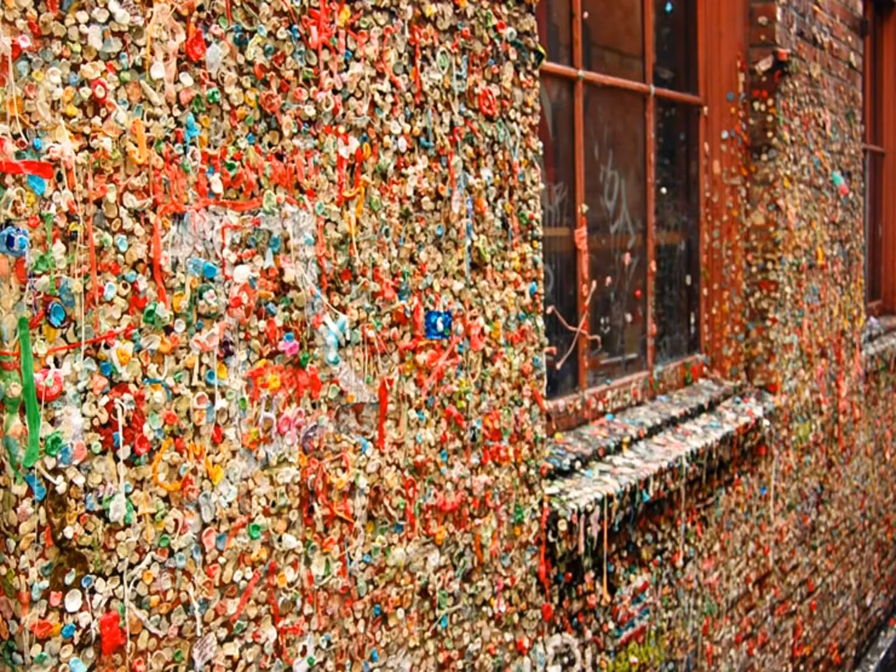Here's a bit of a test for everybody. Since you've been to Pike Place Market, can anybody tell me what this is? This is a tourist attraction called the gum wall, where for about 20 years, up until November of last year, people walking in off Pike Street, crossing First Avenue and heading left, would find a little road tapering down below the market and hooking south. That's where the gum wall is, in case you haven't seen it. It's not in that condition anymore, because in November of last year, the local businesses and residents of Seattle petitioned and got it removed. They took 2,350 pounds of bubble gum off that wall. Maybe there's an opportunity for a modifier there, I don't know if anyone's thought about that, but just a little bit of information.

Anybody traveling with kids? Not too many hands. Well, that's good, because you wouldn't want to take your child down there. You also may come away, if you had a child with you, and noticed they weren't chewing gum before they visited the wall, you might want to pay attention afterward.

All right, well, I guess it's time to get into the fun, exciting stuff of asphalt. Just a few facts about our agency, though.

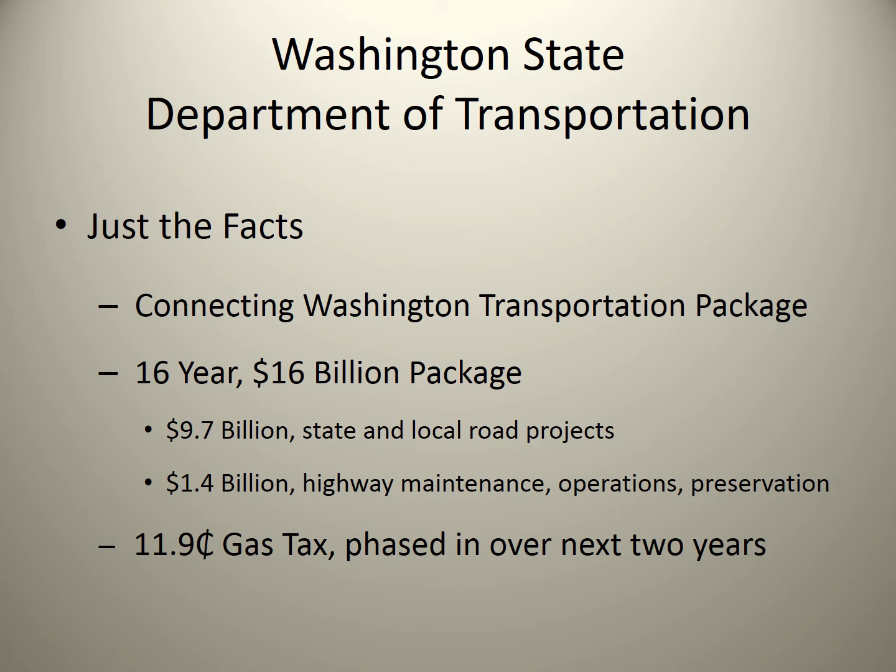After the presentation given earlier, Washington State, a year ago, was in pretty dire straits. We didn't have much in the way of funding, we didn't have a budget package. We were getting to that situation Delmar talked about with pavement preservation. Our pavement management system showed we had enough money maybe to pothole patch and maintain our highways. Fortunately, at the end of last year, taxpayers and politicians in our state passed a budget through our Connecting Washington package, our transportation package. It's a 16-year, $16 billion package. Of note is $9.7 billion for state and local roads. We also have $1.4 billion for highway maintenance, operation, and preservation, phased in over 2 years with a gas tax of 11.9 cents per gallon for the next 2 years.

A little bit about our agency, some facts. We manage approximately 18,500 lane miles. It is our charge, our duty to maintain or to build and maintain smooth, safe, and economical pavements.

A little bit about our forecast. Our construction office does a very good job of predicting and tracking what our projections are from year to year. This is our 2016 forecast. We anticipate a little over 1 million tons of HMA placed.

In my 30 years with the agency, I think our record year was just south of 3 million tons. We've had up to close to that, but I've seen it as low as 600,000, and that's where we were getting to with our lack of funding until recently.

We don't expect to see a huge change in our construction program this year. It should start picking up a little bit more next year, and then as we start moving into getting the funding, we'll be getting more projects placed out there. Of that little over 1 million tons, over half is anticipated to be built with modified asphalts.

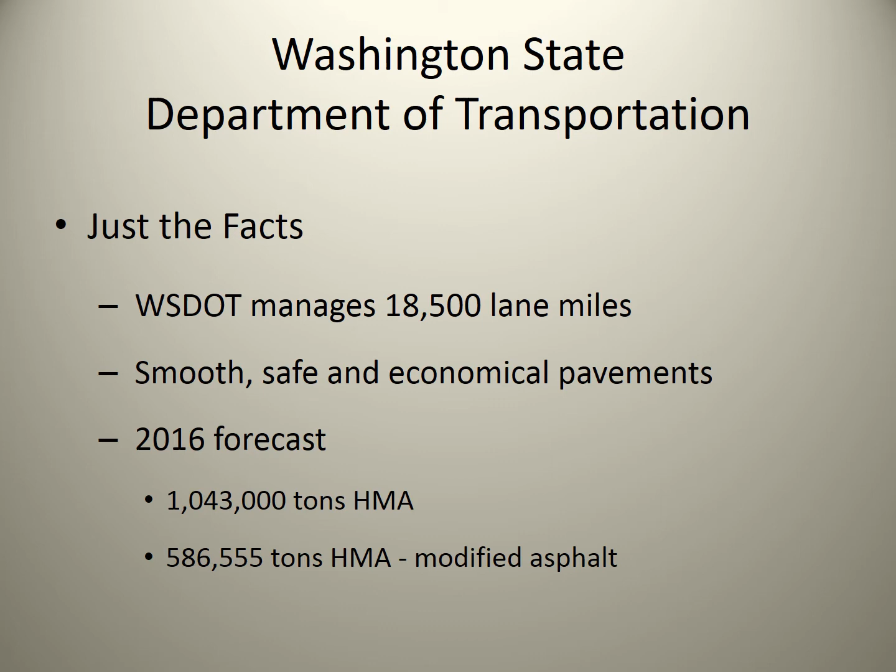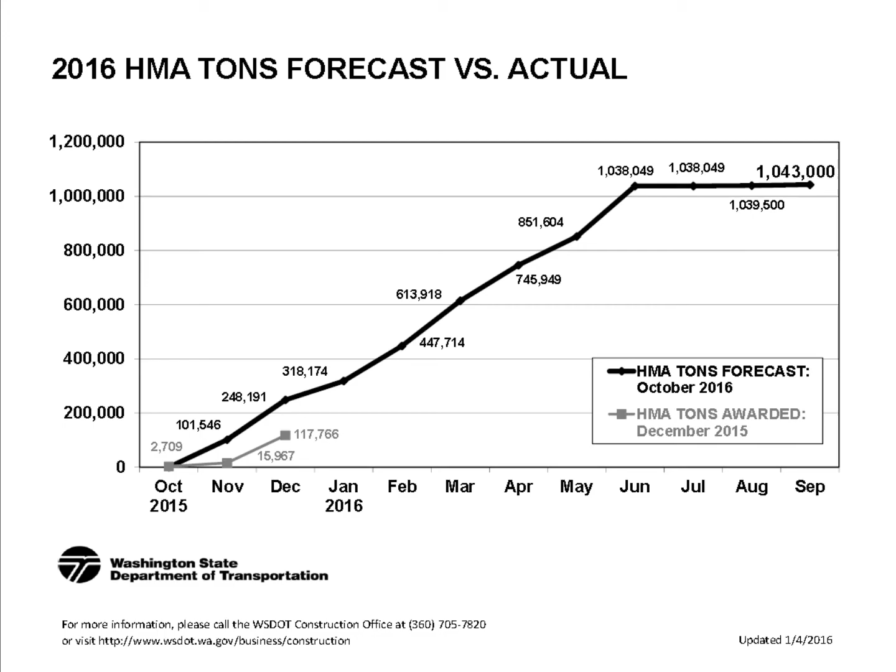Okay, a little bit of background about how we got to where we're at. It was through the Superpave SHRP efforts. We got into the pooled fund studies in the mid-90s, and we started working with the PG binders, performance graded binders, first. While participating in the pooled fund study, we started placing test sections on projects, and then ultimately worked our way up into trial projects with the PG graded asphalt.

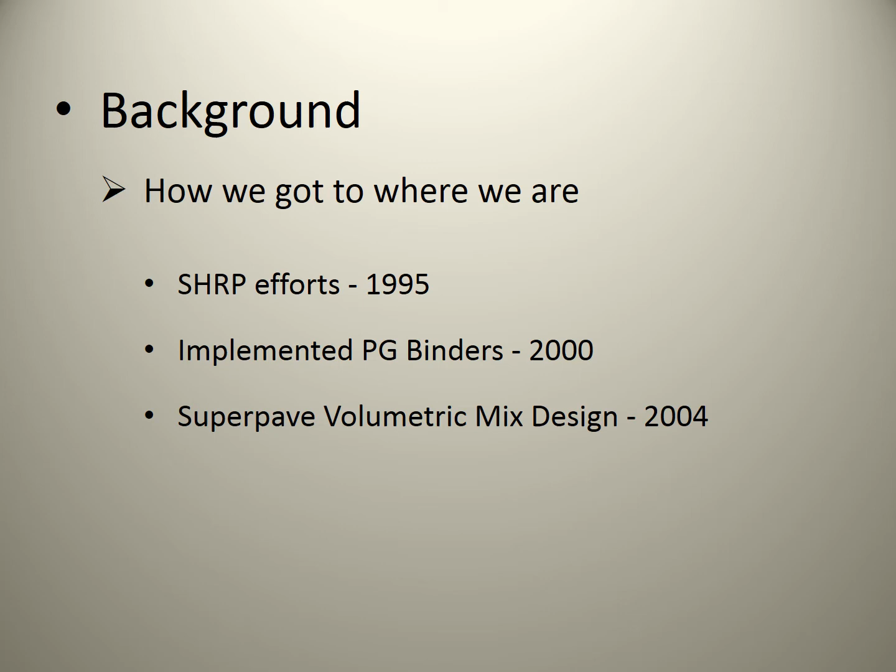Our first PG graded asphalt trial project was in 1996, and then we fully implemented the PG binder system - actually it was 1999 when we implemented it, but you didn't see it in print in our specifications until 2000. As we moved into Superpave, we did the same concept: test sections, then trial projects, and ultimately implemented Superpave volumetric mix design in 2004.

Over the years, the things we've learned are the importance of asphalt and anti-strip compatibility. We also learned quite a bit about asphalt modification - the products and the processes used to modify asphalts - and the benefit from some polymer modification. We learned a lot of this primarily through use of our Hamburg and our multiple stress creep recovery testing.

As a footnote, we've been testing using MSCR well before its T350 test procedure, or M332. We started testing early on after we saw D'Angelo's work, and we were doing it when the temperatures were still elevated. But every binder that we get in our door at the DOT, we've been testing with conventional M320 as well as M332, so we've got a lot of data. We've learned quite a bit about the asphalt binders we have in our state.

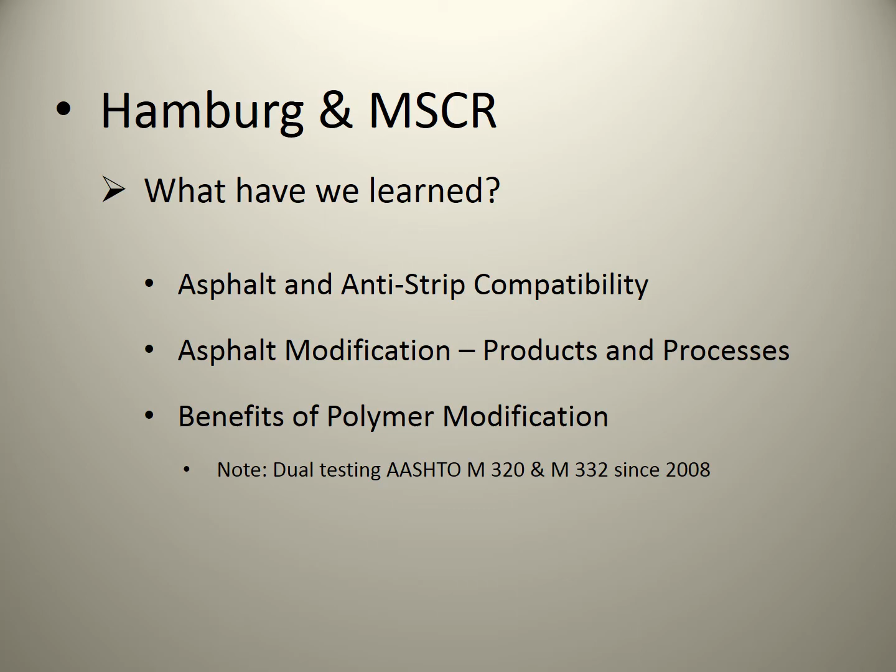Okay, on to the Hamburg. I used to say Hamburg, but since I was born in Germany, I should pronounce it the way they would, which would be Hamburg.

We don't have the MSCR currently, and I'll get to that - good question. But we really hope to, and later on I'll make kind of a plea to everybody here about what we'd like to see done in Washington. We seem to be the only state in our region so far that's pushing hard into that.

With the Hamburg, we bought our first Hamburg in 2010, and once we got it, we started testing every mix design we get in our door.

On average this year, with a little over 1 million tons, we're anticipating somewhere between 80 and 90 mix designs in our doors. So we've got a lot of data that we've tested with HMA using our Hamburg.

2010 is when we started testing every one of our mix designs. If you know anything about those, we set it and forget it, and you come back with 6 to 7 hours later. This is one of the early mix designs we tested, and what we believed through our Hveem stability mix design was a good product.

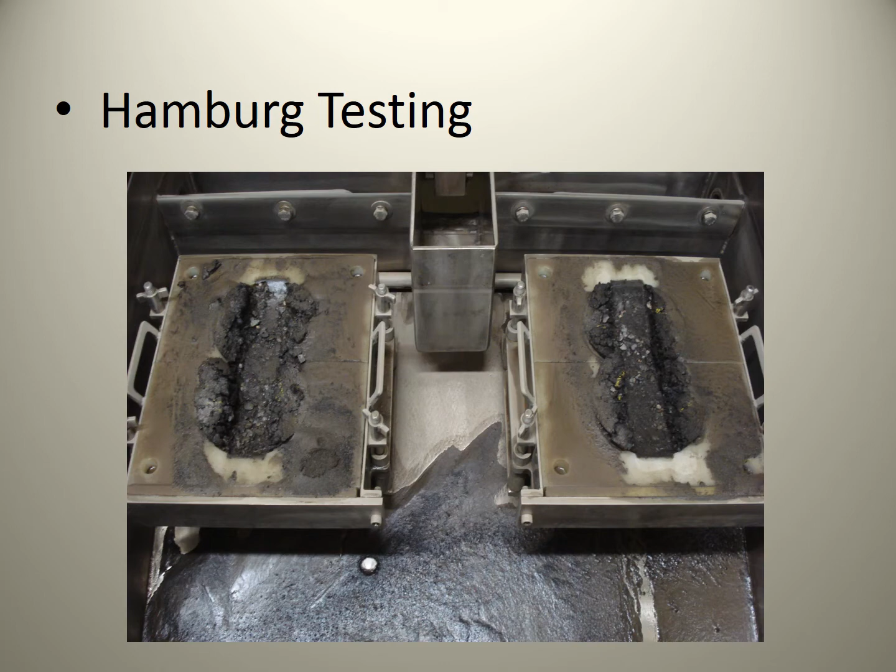Here's another nice one - anybody see silty fines? So these are the type of mix designs, not everyone, but we were seeing somewhere in the neighborhood of maybe a dozen of those out of say 80 mix designs. That's a pretty high percentage as far as we were concerned, where we were seeing questionable or concerning results out of Hamburg.

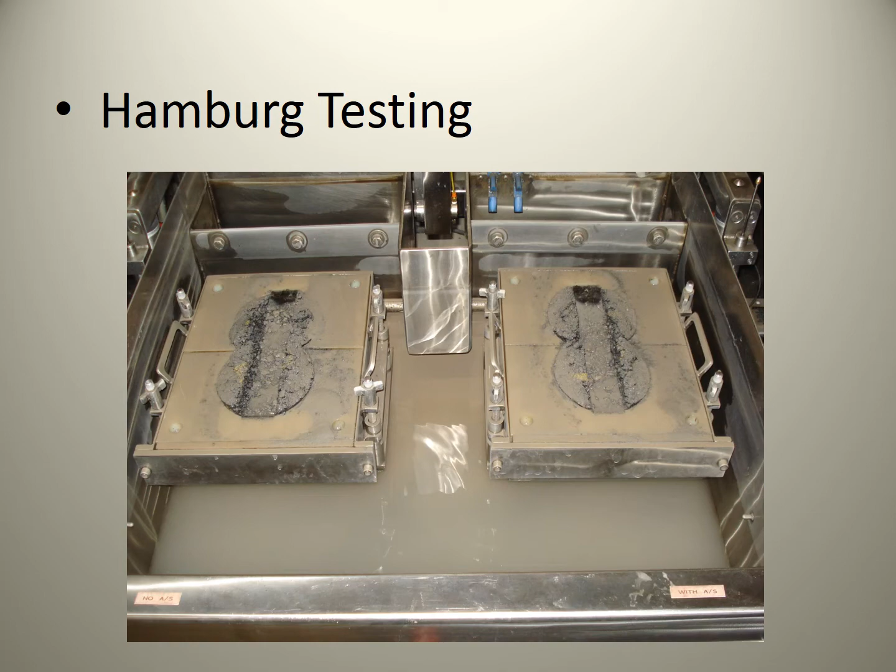I got to do that. I got to convince myself.

Okay, as I mentioned before, a little bit of background. This is our state - we use what I call a modified Lottman process. That's because we took the T283, and again, because of the sheer volume of mix designs we evaluate through the year, we don't do the 3 replicates at every point. We do a single set. So that's why we had to do our secondary modification of that.

As we test in our Hamburg, we'll always test a sample with no anti-strip. We'll also test samples with anti-strip based on what our modified Lottman procedure tells us. So if we see a benefit in tensile strength, and/or if we see any stripping with no anti-strip, we typically would move to using quarter increments of a typical amine-based anti-strip. I think nowadays we have somewhere in the neighborhood of 24 different anti-strip additives on our QPL. So you can imagine it's quite a thing to manage, or to say that we're using the same materials in every one of these mix designs with the binders.

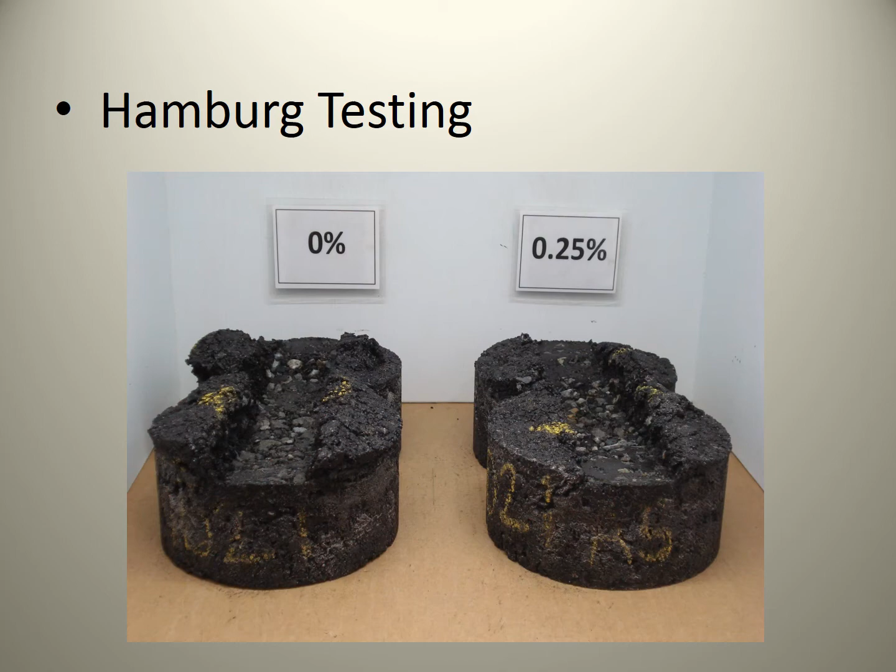This is a conventional half-inch HMA mix design that we tested in 2011, where, by the way, this is a neat asphalt - this is 64-22 half-inch HMA. When we ran it through our modified Lottman process, we saw a benefit by using 1/4% anti-strip. So as we tested it, neither one of them looked excellent, but graphically, here's what that looked like.

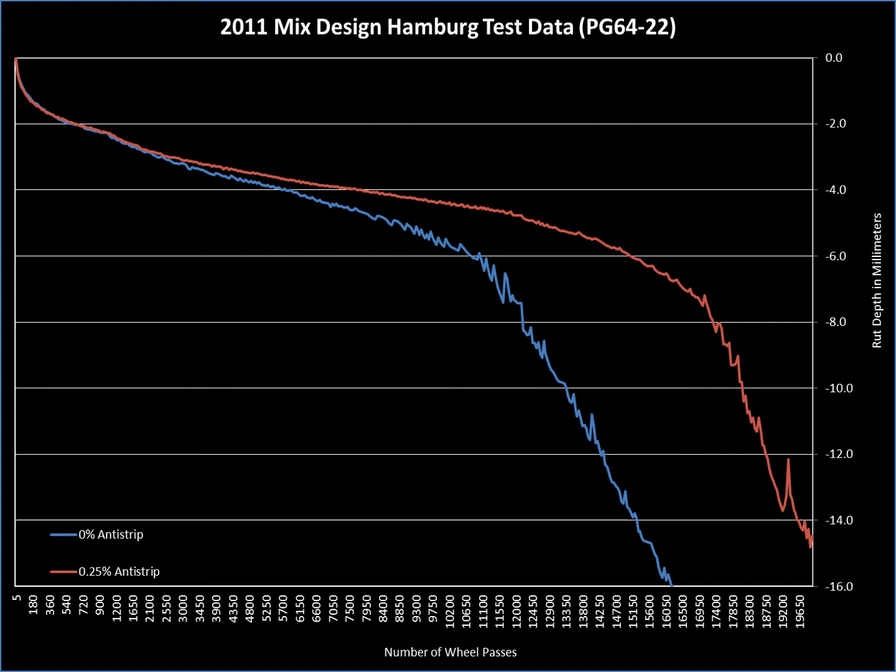We did see a benefit from using anti-strip, and if you fast forward, the specification we're using for Hamburg would have failed with no anti-strip, because we have a 10 millimeter rut depth maximum and it has to have a minimum of 15,000 passes. So you can see here we were able to get this particular mix design to pass under what we use as a specification by use of anti-strip, and this again was with a neat asphalt.

Okay, here's where things start to get interesting for us. In 2011, we started noticing a trend. When we tested this particular HMA, another conventional mix, with what we expect to be a modified asphalt - we have the two together, that's 92, 64-28.

You don't see in the picture that we had any stripping, but we definitely saw something that we consider to be an indication of compatibility issues with asphalt and anti-strip. In our state, we don't get into formulation or dictate what it takes to meet the specification. We try to rely on our test procedures and specifications to get products we know will perform.

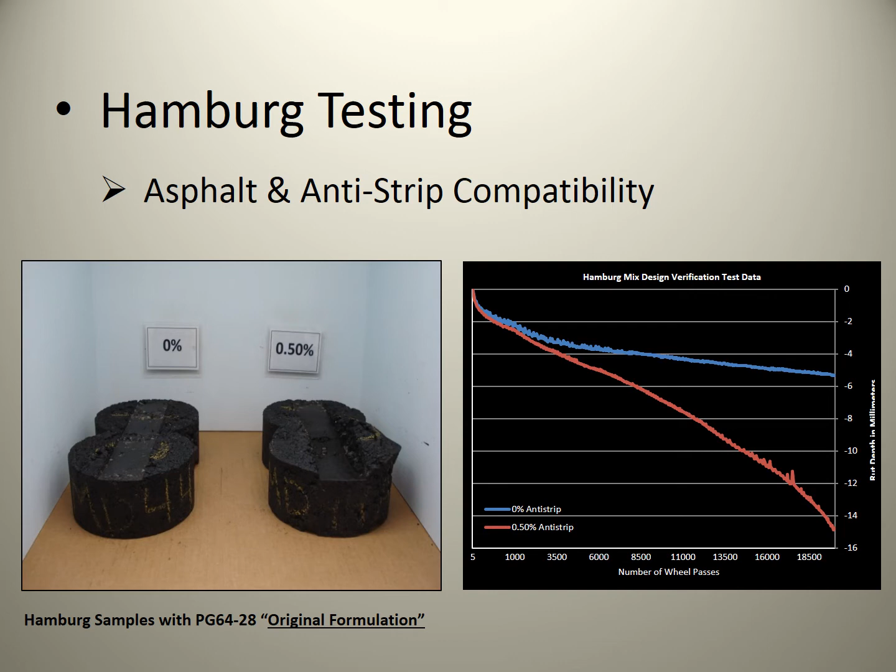So this is what we saw, and this was not the only mix design where this happened. After we saw this particular mix, we did our due diligence and went back to analyze the data we had.

We not only test every mix design that comes in the door, which met all the volumetric properties, but we also test all of our asphalt binders. Asphalt suppliers in our state know that when we're working on mix designs, we come to you directly and get 40 quarts of whatever grade of asphalt it is. We test those to make sure they're in specification, and we use those materials in our mix design analysis.

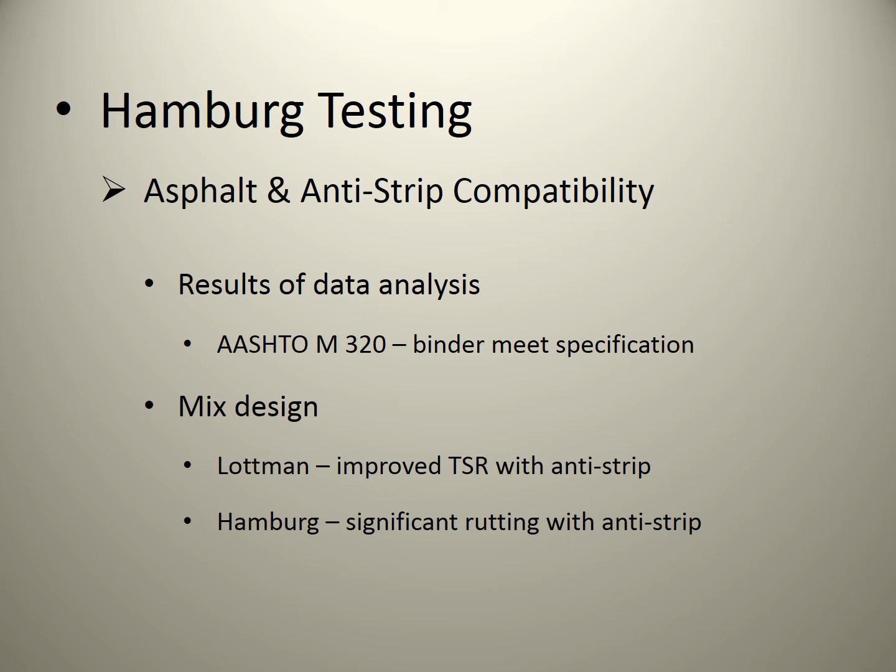This particular mix had no problem meeting the M320 specifications. Again, when we tested by the Lottman process, we showed improved TSR, as I mentioned, at 0.5%. The Hamburg test just showed there was a compatibility issue, we believe. That's about as far as I want to get into the compatibility side, because I'm not the chemist. There are probably a lot more people in this room who can tell me much more about that.

So the particular asphalt supplier that provided that product was very forthcoming. We contacted them and asked a little bit about the formulation, told them what we observed, and they said no, it was not a polymer modified product, but it was modified. That's as much as we wanted to hear.

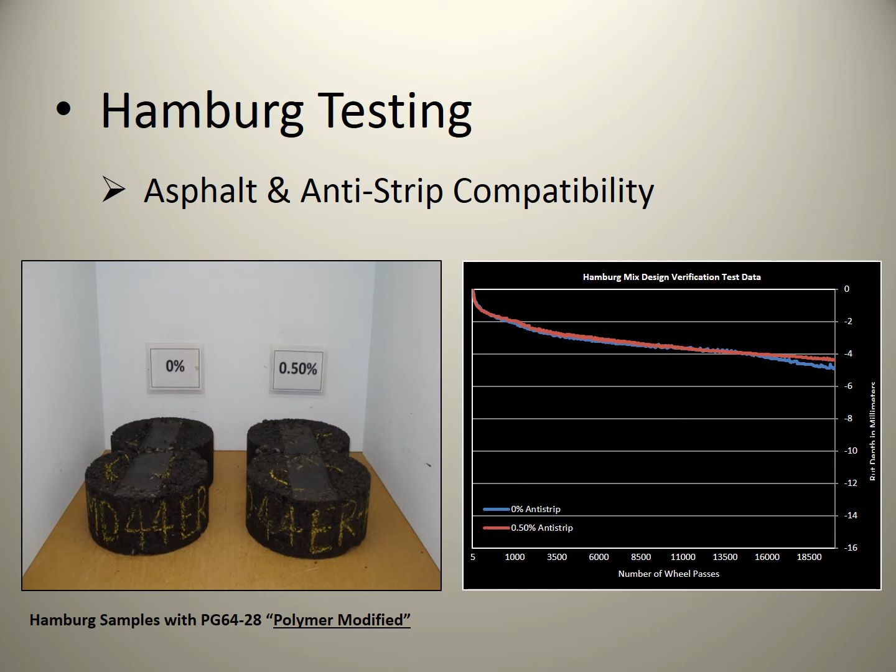But they did offer, and provide to us, a 64-28 that was polymer modified, and this is that exact same mix design with a polymer modified PG 64-28. The results are pretty much on top of each other with no anti-strip. That's very consistent, kind of a stack of the two, that's what we saw.

Again, this is the same material, the only difference is the binder. So when we started looking at what we had coming in the door for our typical modified asphalts, we use 6 grades in the state, but everything we're getting in the door shows a very, very low failure rate of asphalt binders. Everything we're getting in the door is able to meet M320.

We have been testing per M332. We've been testing these products and they have been meeting the JNR and the other specification requirements of M332, excluding the table, the appendix table in Appendix 1, or X1. In addition, once we started seeing this back in 2011, we started testing these materials per AASHTO T301 using elastic recovery. We were resistant to being a plus-spec state, we've just been marching the party line with M320.

We used to be an AR4000W state, and had a little enhancement on our viscosity graded materials. In Eastern Washington, where we have the bulk of our modified asphalts, we used to use a lot of PBA6. When we went to M320, there's no mechanism there - the modification products or processes we're getting were probably not very similar to our PBA6 in order to meet M320.

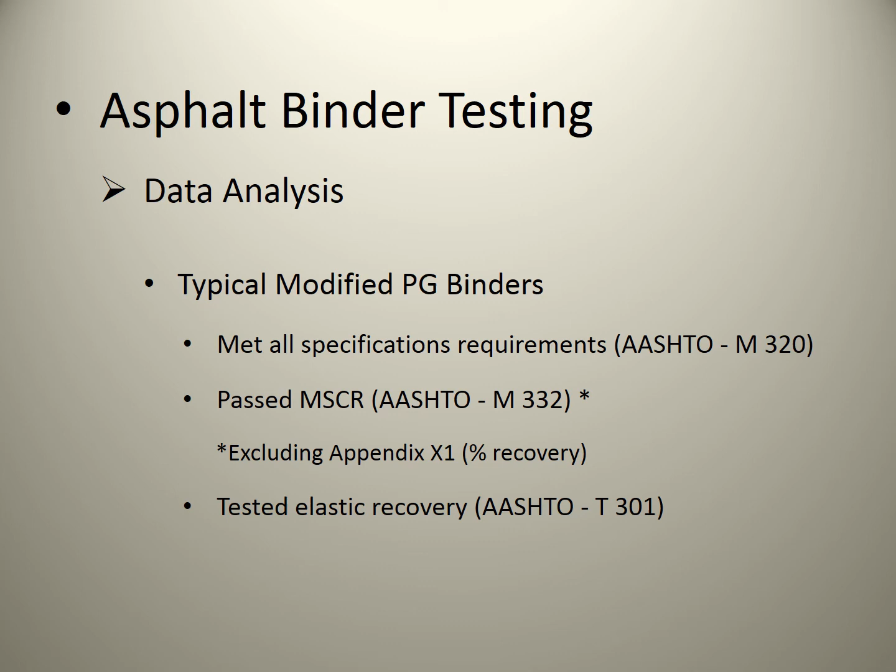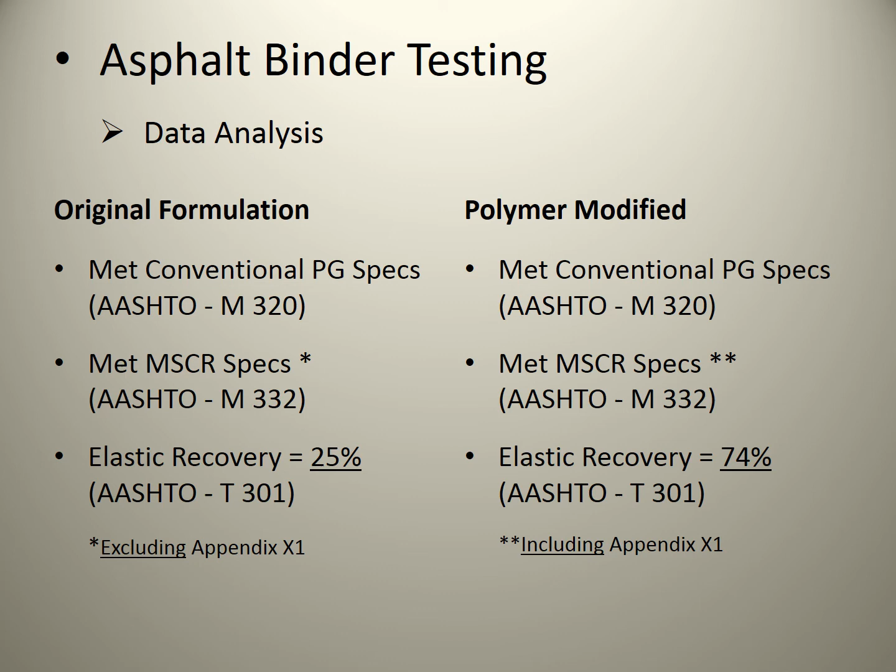So, a little bit of information. These are the two binders that we did that little experiment with. I already mentioned they both met M320. They both met M332, except for the one on the left - the original formulation wouldn't meet that percent recovery table in the appendix. When we tested it per T301, you can see what we got, 25% on the elastic recovery. With that new product, we were able to meet not only M320, but the table. We met the percent recovery, and got a substantially higher number on the elastic recovery. I'm sure you can see these values.

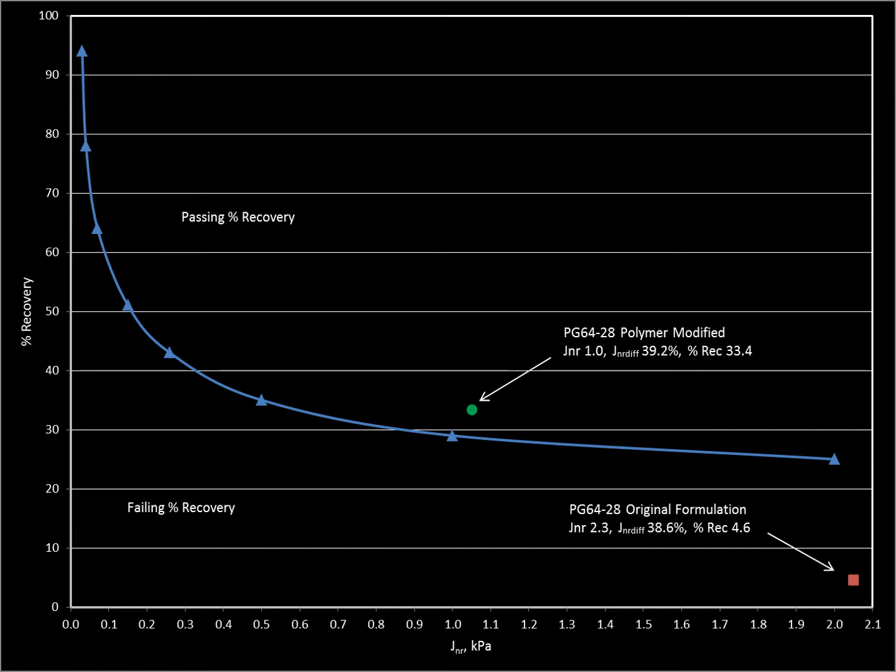Based on the couple of years of data we collected off of the Hamburg and the MSCR, we had to do something to make sure we're getting material that's going to perform. So we did go ahead and implement an elastic recovery specification based on the data we collected for those 2 years. Ultimately, as we moved forward for the next 3 years, collecting information on both our Hamburg and IDT, we also implemented those specifications in 2014.

The IDT specification we're really using as a bookend. The Hamburg loves stiff mixes, but we don't have an overlay tester like Texas or some other states. Those using Hamburg, I think, are all moving to something as a secondary check to make sure they're not getting some form of fatigue cracking. With the equipment we had from the old static press from the Hveem days, we saw a benefit by moving into a room temperature, basically IDT test. So we're using that as a check to make sure we're not getting too high a strength on that and pushing that spectrum too far into stiff, brittle mixes. I'll talk a little more about that in a minute.

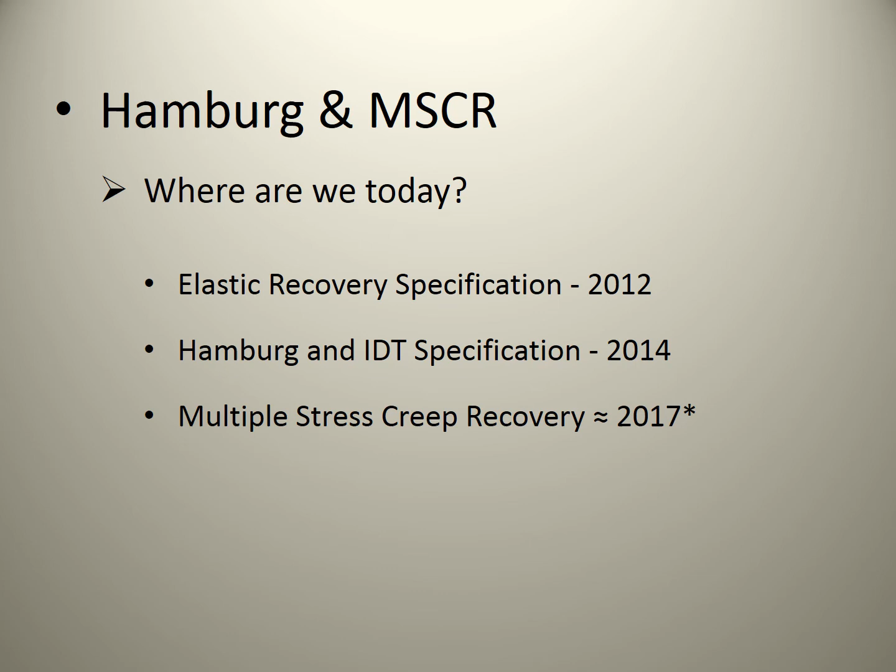Ultimately, as you mentioned, or the question earlier, we're wanting to move to the multiple stress creep recovery test. We've been working quite a bit with this, and I'll talk more about that as we move along. Here's what our elastic recovery specification looks like.

Our state is divided pretty much straight north and south by the Cascades. The 3 grades we use on the west side of the mountains are all PG-22. Our base grade is a 58, with bumps to 64 and then 70. Our east side of the state is all PG-28, with a base grade of 64, a first bump to 70, and a second bump to 76. That's what you see here with our grades of asphalt.

We didn't implement it, obviously, on our neat asphalts. We do have a 60% minimum on the other 4, what we consider to be modified asphalts. And this is a stopgap until we can get to something that we would prefer to do, which I think you know what that is.

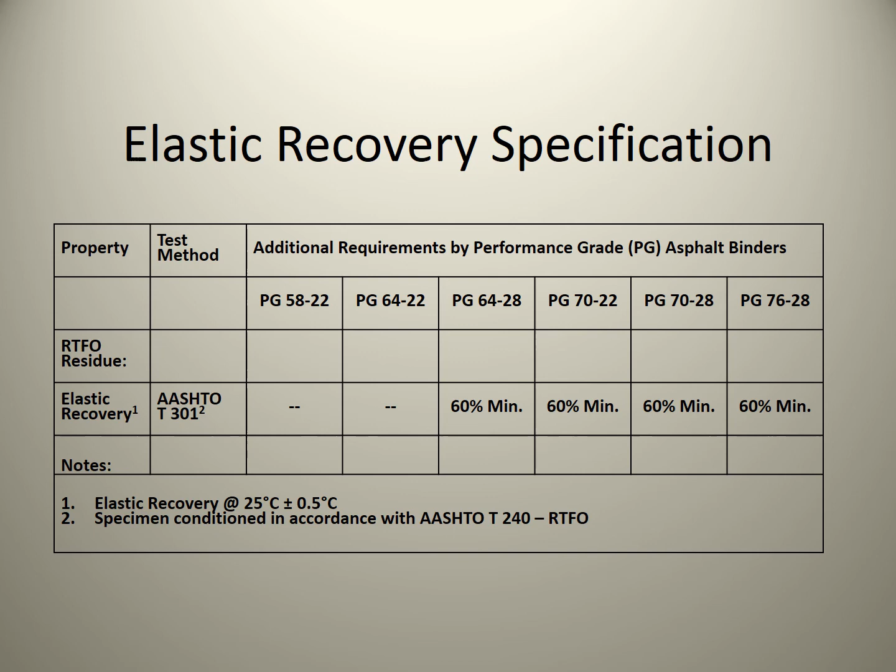And this is our specification. These are all in our 903 standard specifications if you're ever interested to look at these. When we first got into Hamburg and did a lot of this initial testing, we relied heavily on what Texas did, Colorado, Montana, and Utah were doing. Those are the 4 primary states we gleaned information from. Then, when we went back and tested all of our materials for almost 4 years, we came across what we believe to be a pretty fair and reasonably easy specification to implement.

So everything, as I mentioned before, was based around 15,000 passes with a maximum 10 millimeter rut depth. Again, with 15,000 minimum passes, you're not allowed to have any stripping inflection point prior to that, any indication of moisture susceptibility. And then we're using right now 175 PSI maximum for that IDT.

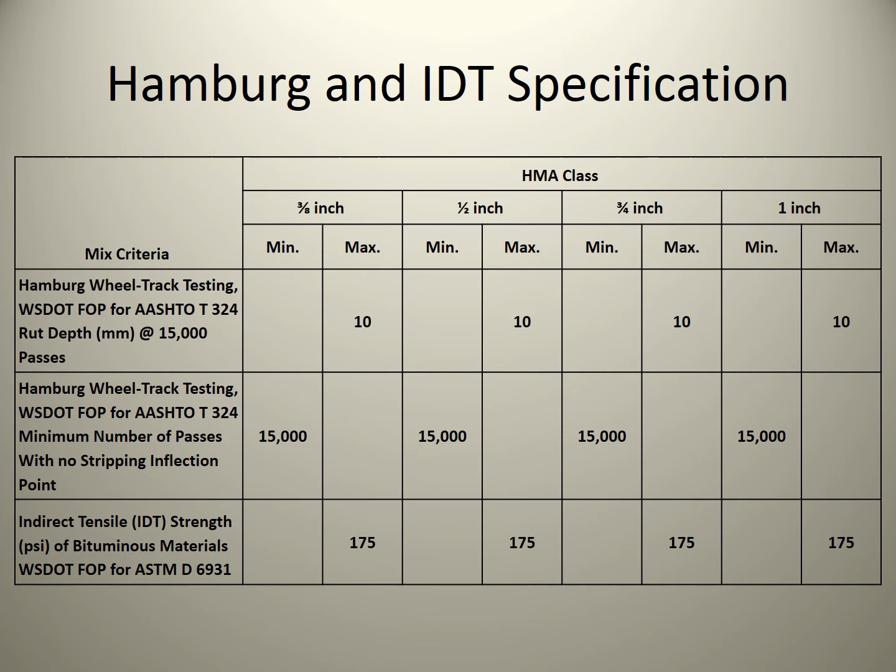We are working, again, with information we're gleaning from Texas A&M Transportation Institute, TTI, Dave Newcomb and those folks, to mathematically see if we can come up with a better way to determine this stripping number, or stripping inflection point, whatever you'd like to refer to it as, so that we can be more fair and equitable about when that takes place, so we're not just using a straight edge to see where we can spot a change in slope to determine moisture susceptibility.

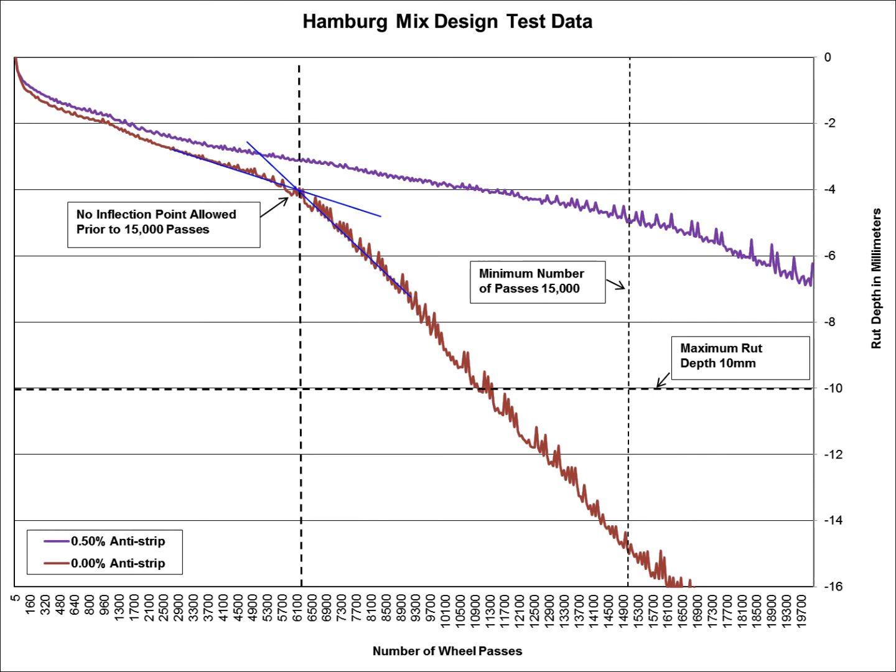They're working on that area under the curve, or the fracture work concept, and we're looking hard at that to see if we can come up with a better way of specifying that instead of just saying a maximum stiffness or a maximum strength. We really need some dwell. I think you need some opportunity to see that those materials will be able to sustain a load. So we're working a bit on that.

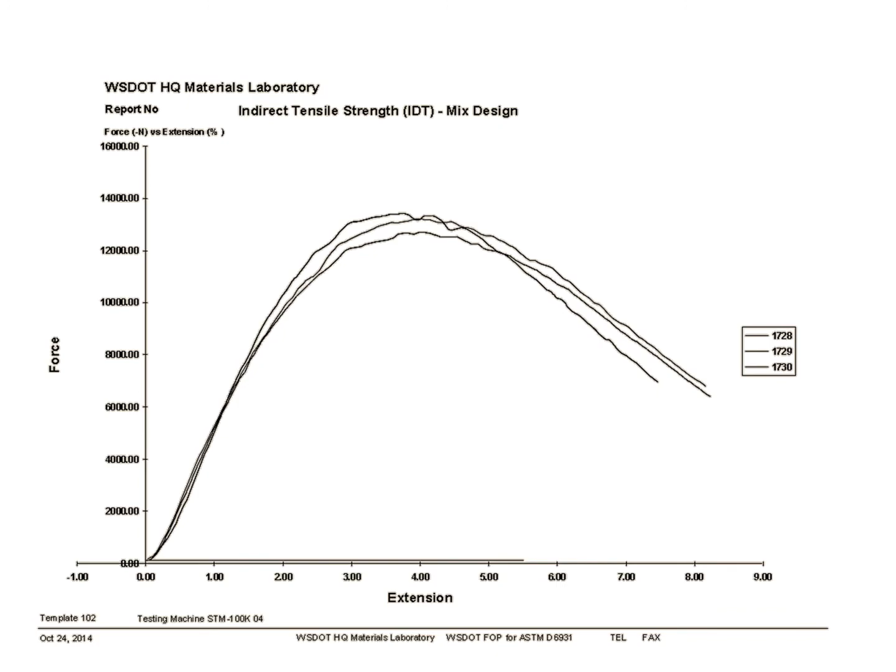And I guess getting to where we're headed next, to kind of answer the question that was asked earlier, the multiple stress creep recovery is what we really want to see move forward. We've been working with everybody and anybody that will listen to us. I'm on the Washington Asphalt Pavement Association task group.

We're breaking out with some of the suppliers and working on this. We've been working with the Pacific Coast Conference, where I'm co-chair for the MSCR task group. And a little kudos to Mike Anderson and Asphalt Institute.

They helped us immensely to put together an interlaboratory study last year, I guess it's probably two years now, Mike, where they took our results, plotted out, came up with what we had for precision and bias. I think our numbers matched up pretty well to what the East Coast User Producer Group had, and I think there's two or three other ILSs that have conducted the same work. Yes, the reproducibility and the numbers are not where we would like to see them, but I guess the thing I want everybody to remember is, when we went into PG binders, were those numbers, were those precision and bias statements as good as you would have liked to see when we made that move?

I don't think so. As a matter of fact, to this day, the PAV DSR is not great. I really wish that everybody would strongly consider this. I guess this is kind of my beating the drum and asking for help.

We're looking for regional assistance. We're talking to other DOTs, our asphalt suppliers, and I guess I'd ask everybody in this room, in whatever capacity you fulfill or whatever your role is in this industry, to try to test these materials using M332 or T350, and compare them to M320, so we can get consistent results and everybody gets comfortable and moves forward with this. I think the technology is there.

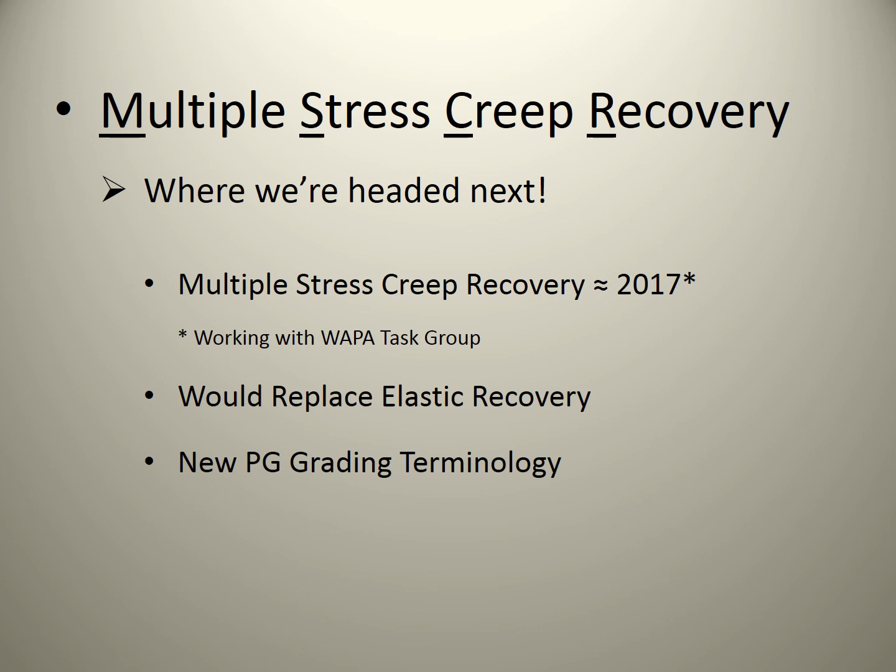One of the first concerns that we've heard from industry was what we're calling these materials, and I'll get to that in just a second. But again, if you look at the current system, the flaw was that this was built around neat, unmodified asphalt. I don't think this is anything new to anybody here.

We've already talked, everybody understands how these are environmentally determined, the base grades. We all know that they're bumped for traffic and loading, but the problem with the current system is it was kind of an add-in late. In order to get that bump, they're just asking for additional stiffness at elevated temperature that's not realized in the field. That's just as unfortunate that they had to do it that way, I guess, but that was a quick fix for an answer that they didn't have at the time.

And again, this allows for products and processes that can affect performance, whereas with the multiple stress creep recovery process, we have this bump, increased stiffness at service temperature. That seems like kind of a no-brainer to me. And then the other thing is that these types of products and processes kind of ensure the performance. Maybe that's a bold statement or bold proclamation, but that's my belief.

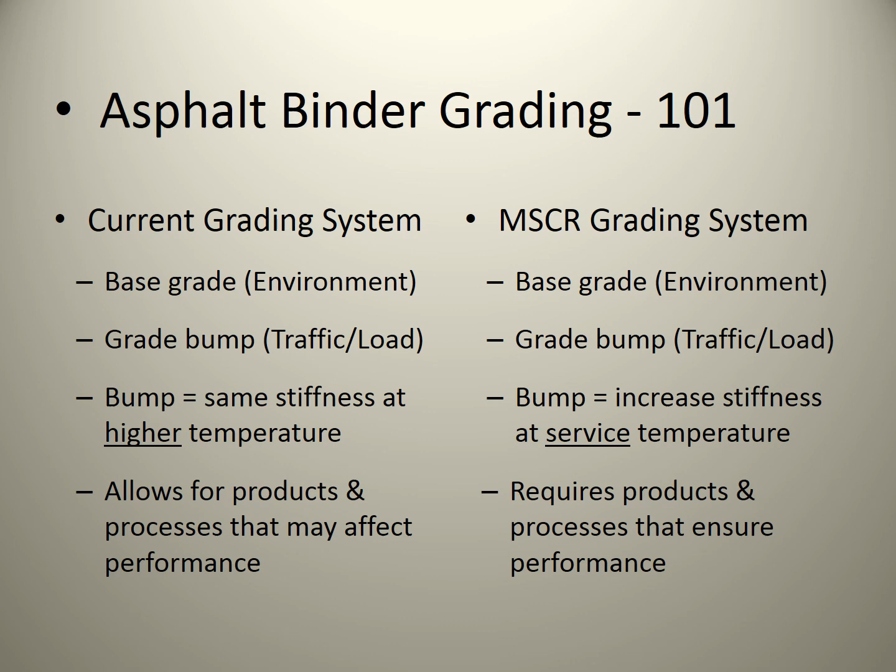If we moved into what the current M332 materials are, at least for our state, we'd be moving into the 58, SH and V, and I'll show you another slide. Almost everybody, we're almost not seeing a need for S. Everybody's far exceeding that 4 on the JNR. Everybody seems to be more than capable of producing these products below 2. So that's another thing we're running into.

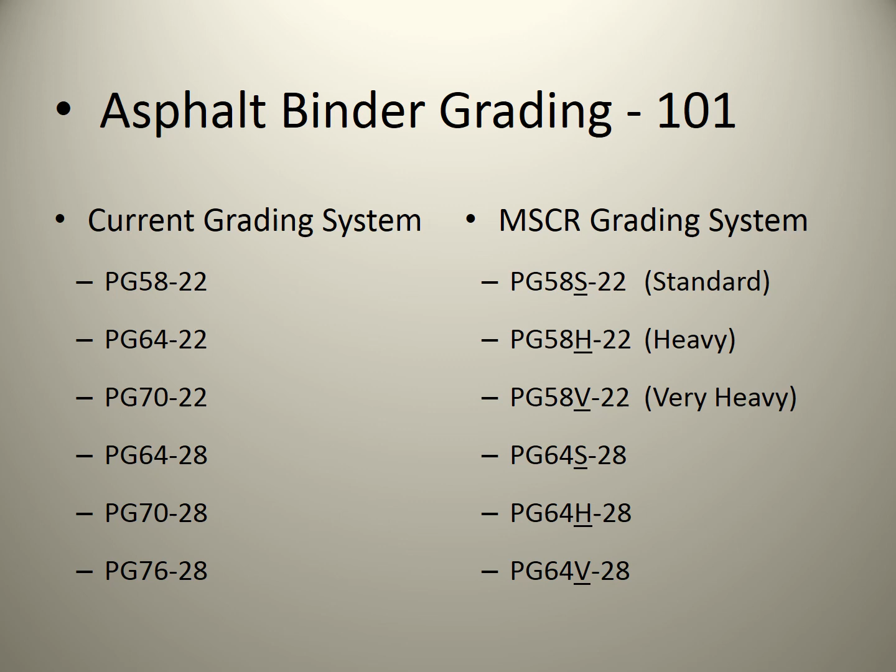There's no E there, which was kind of the newest add-in to the specification. Right now, we don't see that we would use that in our state, unless it was in some areas perhaps like Port of Tacoma, where you have a lot of standing extremely heavy load, where you obviously need the E. There may be applications where it's warranted or necessary, but at least from a state highway standpoint, there's not too many places you would need that.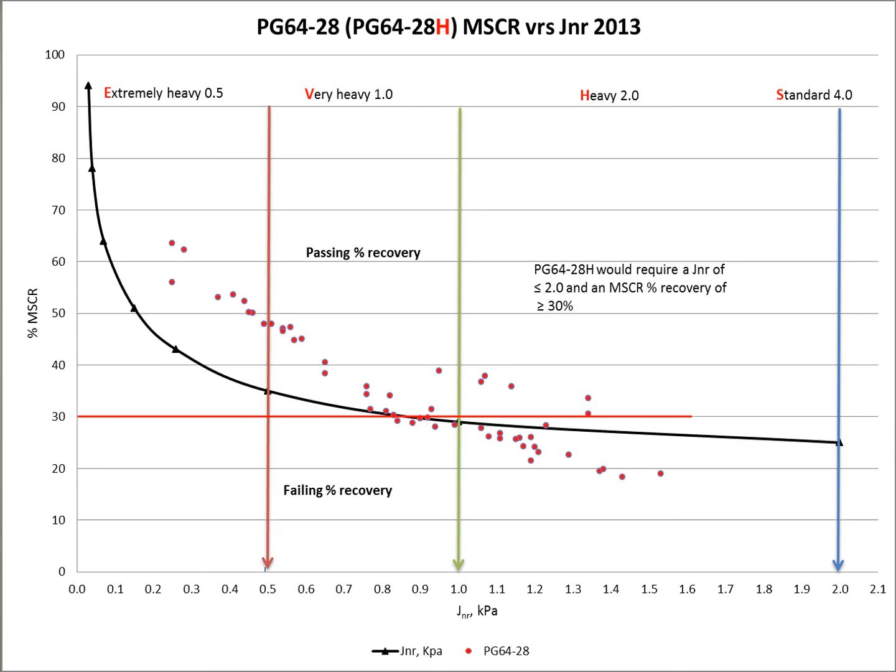Any questions? Yeah, Cal. Okay.

This is Tom Rosenmeyer with Lehigh Technologies. I was wondering if you have any experience with rubber modified asphalt or hybrid systems?

I think everybody heard your question: do we have experience with rubber? We don't specify what's to be used. I guess maybe that's a blind eye, and maybe an advantage from our standpoint, that we don't get into formulation. We're not anti-AR or rubberized asphalt.

Many years ago, I remember working in the laboratory when that federal mandate came down - we shall use rubber, tire rubber - and we were faced with having to use it in ungodly manners. But I can remember some of the PBA6 GR, and I remember after pulling it out of my mixing bowl and I saw strings coming off, and you could have run them across the lab and they never break. So I had the advantage of working with some early day rubberized products.

We're not opposed to them, but we're not out actively seeking use of rubberized materials, mainly because, at least from what we've seen, it's been cost prohibitive. And that's really what it boils down to. I don't doubt they can perform - we've seen some great things. But at least in our state, it's kind of been one of those opportunities where, if industry really was interested and saw an advantage and wanted to pursue it, we would probably support it.